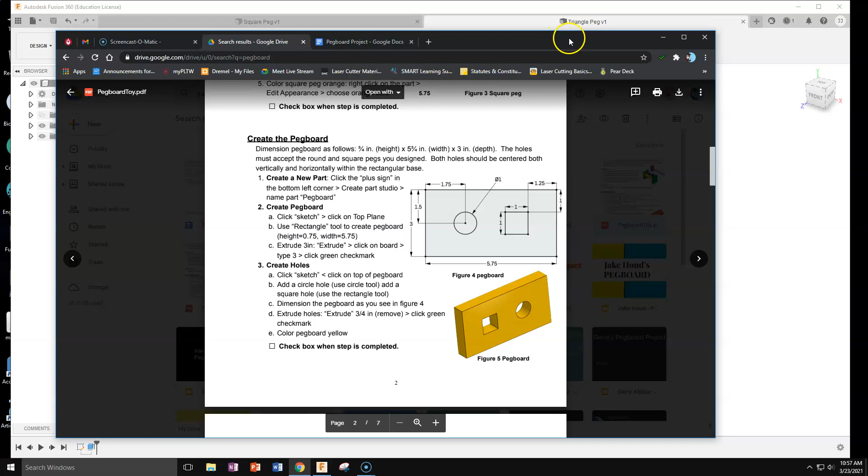All right, so we're in Fusion. We're making sure we're in our project by clicking the data panel. If not, go to Home, find your project, open it, then close this X. We're going to come over here and start a new design. Yours will default to a new design if you've just opened it up. Okay, good.

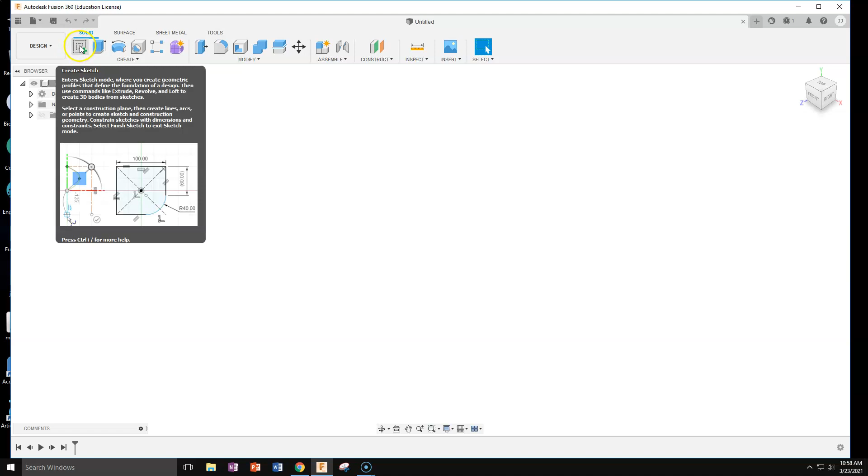So let's go to create a sketch, and we want to work on the top plane again. So we're still in the top plane for most of this project, which is great because it's easy to work with. I clicked on that XZ plane and I see the word top here. If you don't see top, go back and try it again, undo, do it again. All right, so we're going to make a simple rectangle by using the 2-point rectangle tool.

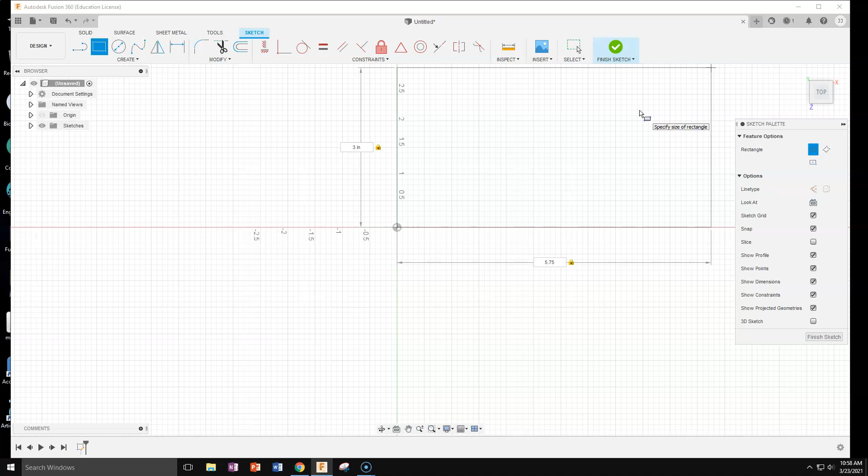Left click in the origin and drag. We want this to be 3 inches, and I'm hitting 3 and tab to get through to my numbers there, by 5.75, enter. If you missed those, you can use the dimension tool, drop a rectangle, use the dimension tool, and drag out. If you hit them but they're wrong, just double click and change your numbers. Good to go. Okay, hit enter to escape.

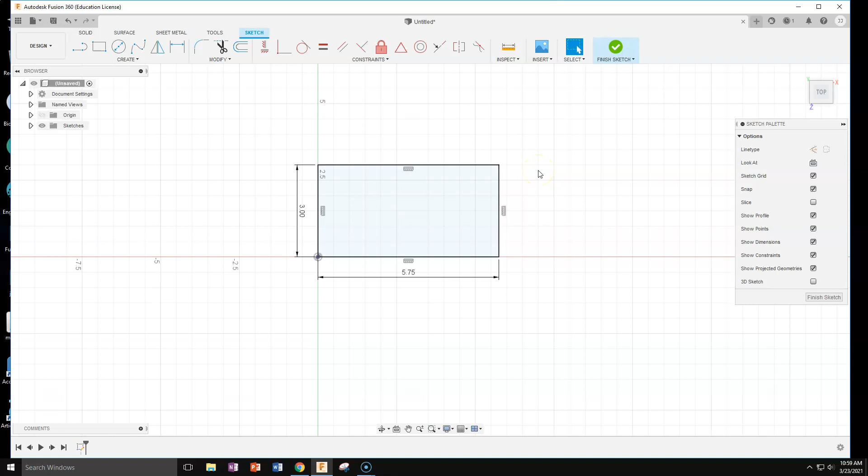I'm going to press down on my mouse to pan this back over to the center. Trying to figure out how wide this is supposed to be. 3 inches is way too much. 0.75. Okay, we're going to finish the sketch.

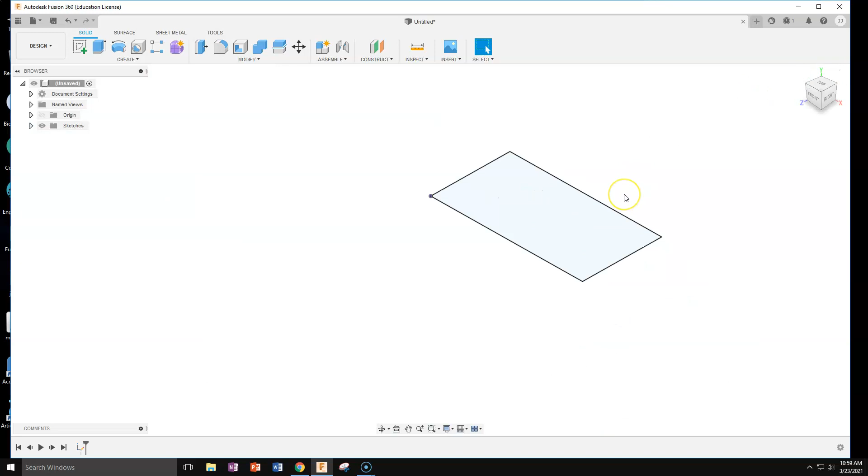And then you can hit the home button to put it isometric so you can watch it extrude. Hit extrude. The home button was up here in case you missed it. And we're going to extrude it 0.75 inches. Doesn't matter what direction, top or bottom, but it's easier to do it this way.

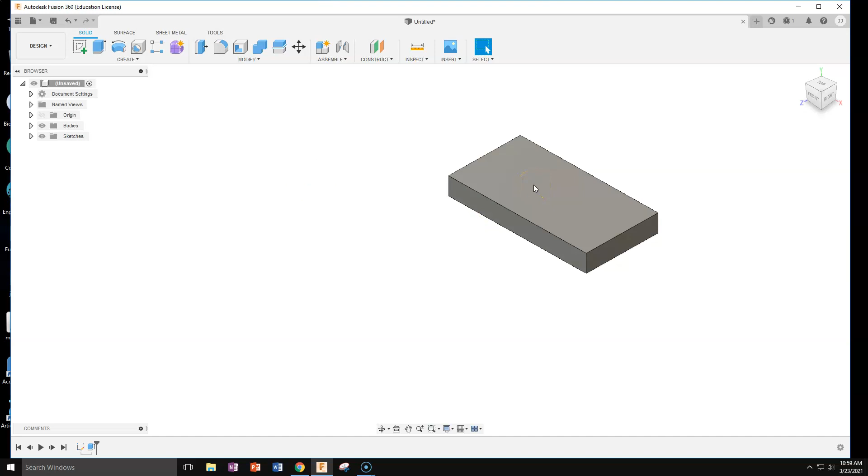Okay, easy peasy. Now we're just going to put a sketch on the top and add a circle and a square so we can put in our 2 pegs, right? All right, so we're going to do a new sketch. You can either create a sketch here or right click right on the object. Make sure you click on the top plane, right on the object. Put this in front of us.

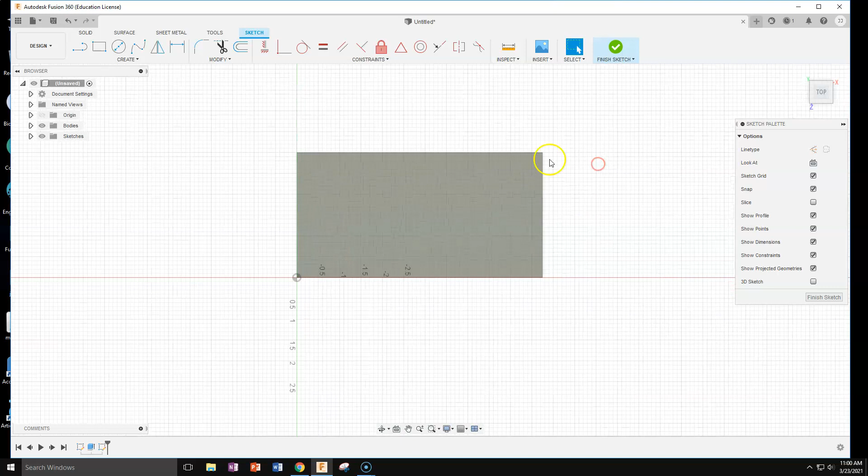Okay, 2 simple sketches. Circle tool, left click, drag it in anywhere, open it up a little bit. That circle should be 1 inch. 1, enter. Now we're just going to place it where we need it to be.

So I'm going to do the dimension tool. This part's tricky, but once you get the hang of it, it's cake. You always want to start from the center, not the outside, the center of your circle when you're using a circle. So left click, and then we're going to go up to the top and left click, and that'll give us the space in between the 2. Left click over here, and it should be 1.5. I don't know how I nailed that, but I got lucky there. I was going to hit enter.

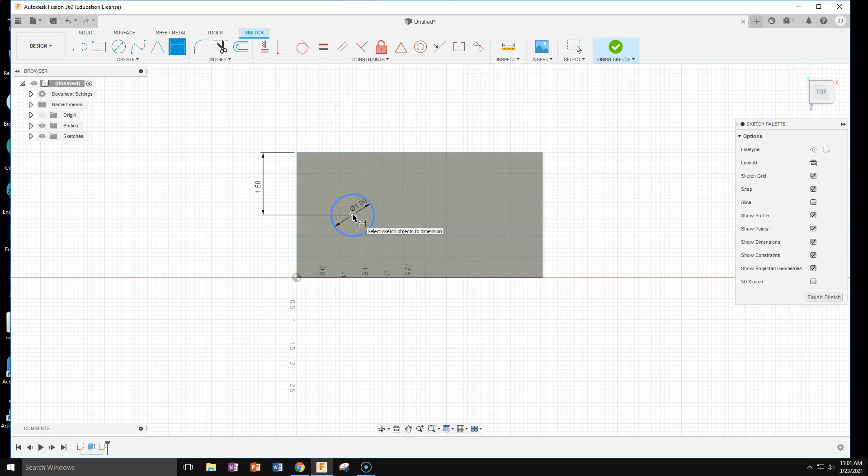Then I want to click the center of the circle again. I'm still in the dimension tool. Now I want to hit the side, and I want to drag up, and I was not so precise this time. This time I want to be 1.75. Make sure that your dimensions are outside of your object and not on top of your object, so they should be out here and not in here, if that makes sense. Okay, they also should be uniform and neat. Let me do a better job. So 1.75, 1.50, that is a done deal.

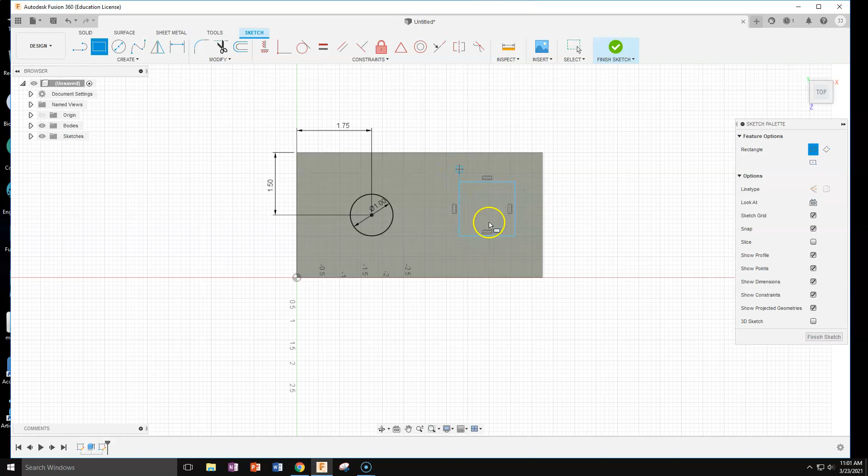The next thing we're going to do is get the 2-point rectangle by left clicking. I'm going to come in here anywhere and drag to the right. And that needs to be 1 inch by 1 inch. I should have typed it in as I was going along, but I missed it. So I'm going to hit the dimension tool, drag it, 1, drag this, 1. Doesn't matter as long as you pick 2 adjacent sides.

Okay, and now let's put it where it belongs. Dimension tool, I'm already on it. And I'm going to go from the top of the little rectangle to the top of the object and get that space in between. I believe that should be 1. Enter. And then from the side here to the side over here, left click, bring it up on top. That should be 1.25. I will show you a schematic in the instructions.

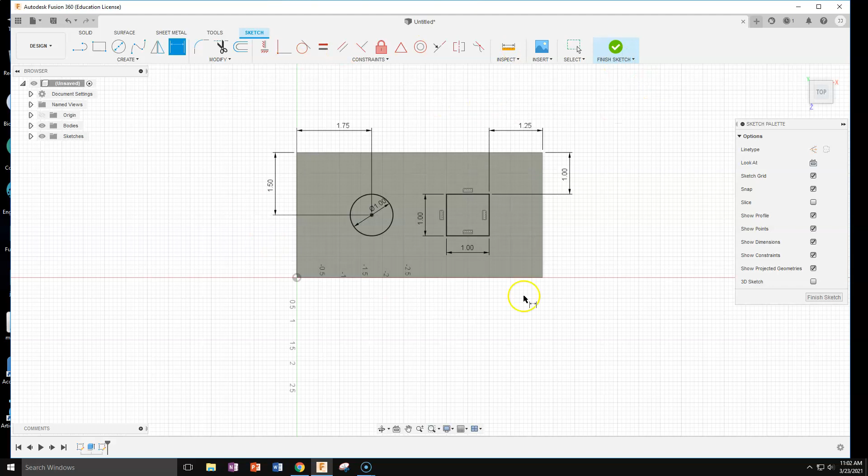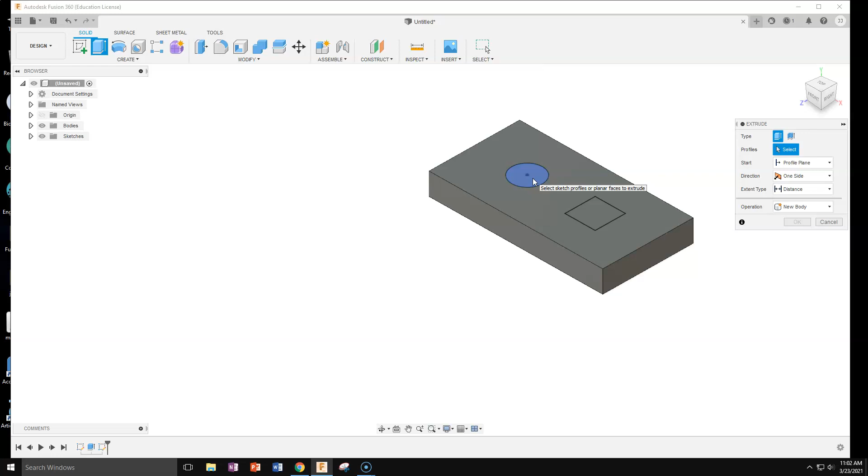Okay, easy peasy, got 2 parts, hit escape, and then we're going to finish the sketch. Finish the sketch, hit the home screen to get it isometric, and we're going to extrude. So hit extrude. For this, it doesn't matter the direction, as long as you just make it disappear. So we're going to click this and this, we want 2 parts, and I think we can just drag. Yeah. Okay, so when you see this solid color, you are creating material, you are extruding.

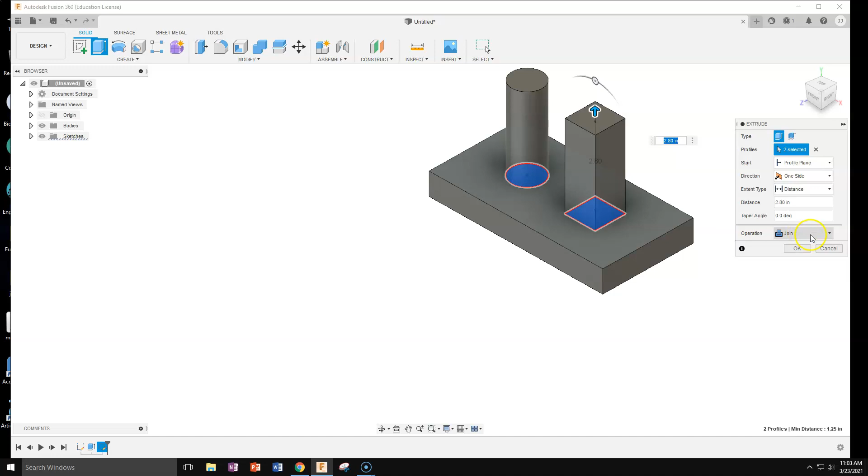When you see that red warning color, you are cutting or removing material. So it changes your operation here. Look here, I'm only being detailed because you got a test coming up. This is cut, but if I went up here, it's join. So you can either choose here or the drop-down menu, or you can drag. Dragging is easier because it's a visual clue. If you're colorblind, you need to use these terms: join to make material and cut to remove.

Hit OK. It doesn't matter the length, it's just going to cut it out. It's going to disappear. Okay, easy peasy. Sorry, I'll stop saying that.

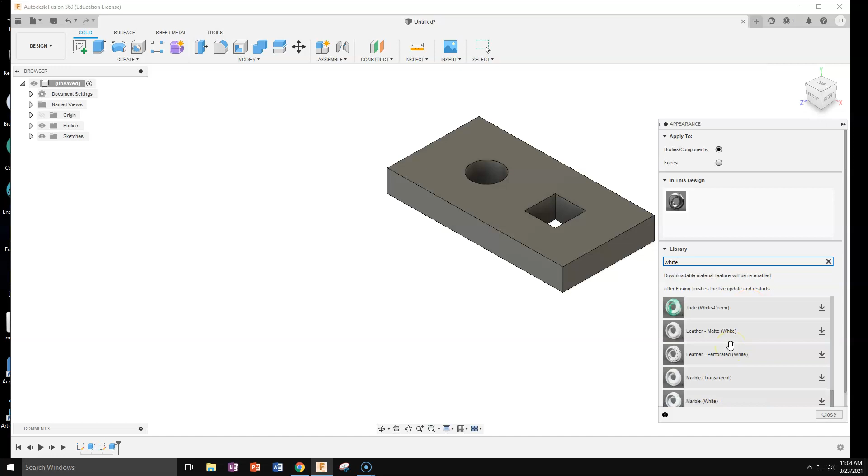Okay, let's hit A on our keyboard and let's add some color to this. I want to go with white, but I don't know how it'll show up with my background. You can change your background, have fun with it, do whatever you want. LED white, that's neat. Polystyrene, that's the stuff that melts in the laser cutter. I'm going to go plastic glossy.

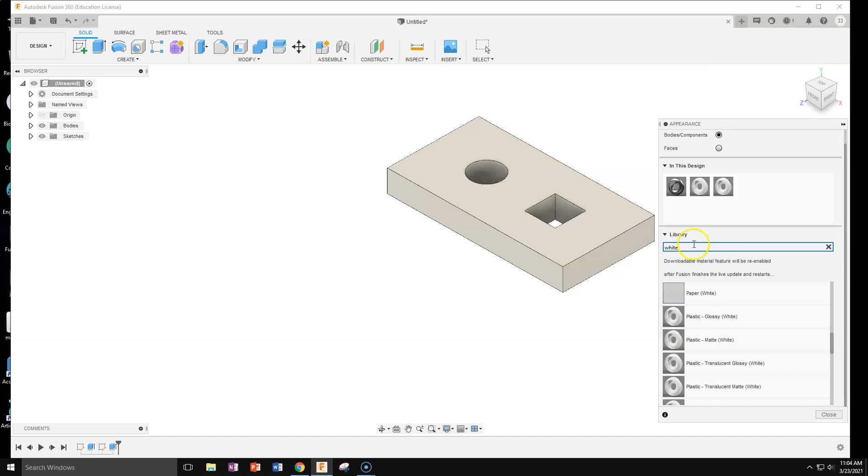Where'd that go? Translucent? No, this one. I don't know, it might be awful. So you just drag it, drag it, see your color. Oh yeah, so it looks like you have to left click to get all the colors. I don't like that, remove. Warning, that's okay. I'm going to choose a different color. So have fun with yours. I'm going to choose a different color and get out of here.

Thanks for watching. Sorry, don't forget to save. So File, Save, and then we call this Top Number 1, because we're going to change it later, and hit save. Make sure it's in your project. Thank you.